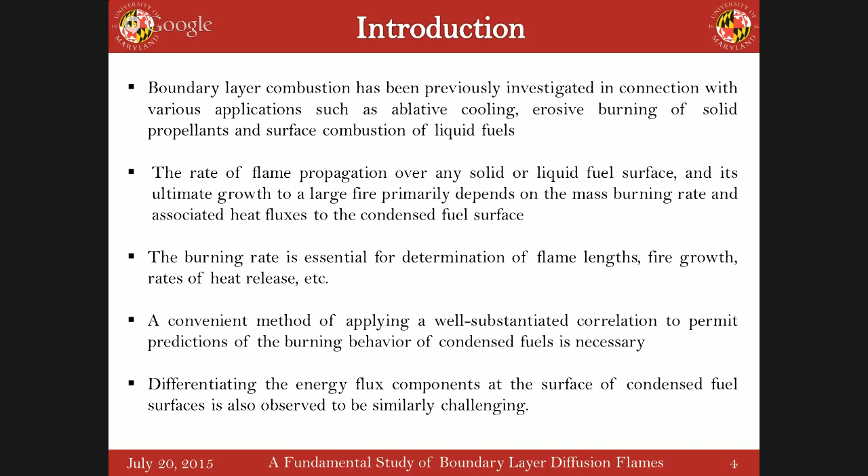So the method we propose here essentially has its basis in the Chilton-Colburn extension to the Reynolds analogy, which essentially relates the heat, momentum, and mass transfer in a boundary layer over a solid or liquid fuel surface. Equation 1 represents that, which essentially relates the heat, mass, and momentum transfer.

Tau S represents the shear stress at the fuel surface, h represents the heat transfer coefficient, M dot represents the mass burning rate per unit area, Nu is the kinematic viscosity, Cp is specific heat, alpha is thermal diffusivity, D is mass diffusivity, and ln(1+B), where B is the mass transfer number, the Spalding number. Now, the ln(1+B) expression comes from the stagnant film hypothesis.

Also, Emmons, in his classical work, when he solved the forced convection burning on a flat plate and gave a similarity solution for that, hypothesized that the shear stress at the surface of a combusting fuel must be proportional to the local mass burning rate. And he came up with this expression, which relates the local mass burning rates with the shear stress at the condensed fuel surface.

So essentially, if you can measure the velocity gradient at the surface of any condensed fuel surface which is burning, you can do the calculation for the local mass burning rate. It's a very neat expression, very simple, though oversimplified. The proportionality constant here depends upon the mass transfer number B.

Also, in a boundary layer, the heat transfer coefficient for the boundary layer diffusion flames can be approximated by equation number 3, where H is related in terms of the non-dimensional temperature gradients at the surface. Now, T star is basically a non-dimensional temperature.

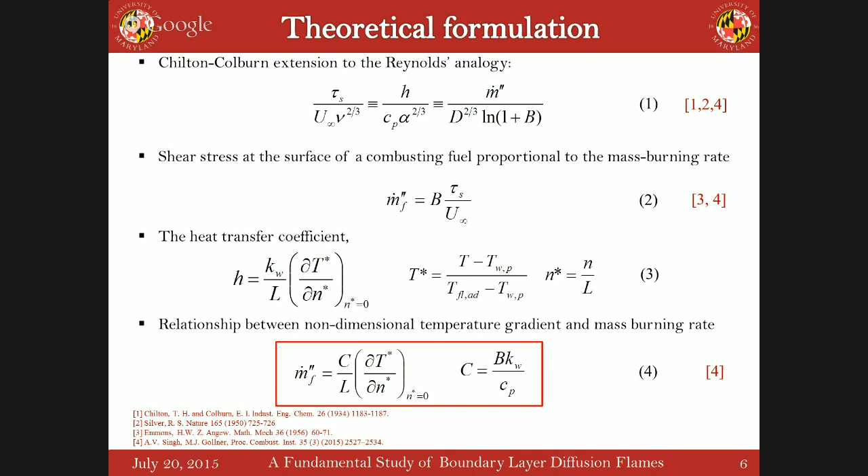So we started with the laminar flames. After formulating this expression, we started looking in the literature for researchers who have reported the temperature profiles as well as mass burning rates in their papers. We could only find 2 papers.

Boundary layer diffusion flames have been studied since the 1950s, 65 years in the past. Only 2 papers in which we found the total temperature profiles along the condensed fuel surface as well as the data of the mass burning rate.

So what we did was take the papers, extract the experimental data, and calculate the local temperature gradients from the temperature profiles. We used our correlation and found that the mass burning rate we predicted actually comes out very close to what they reported. The error was less than 10%.

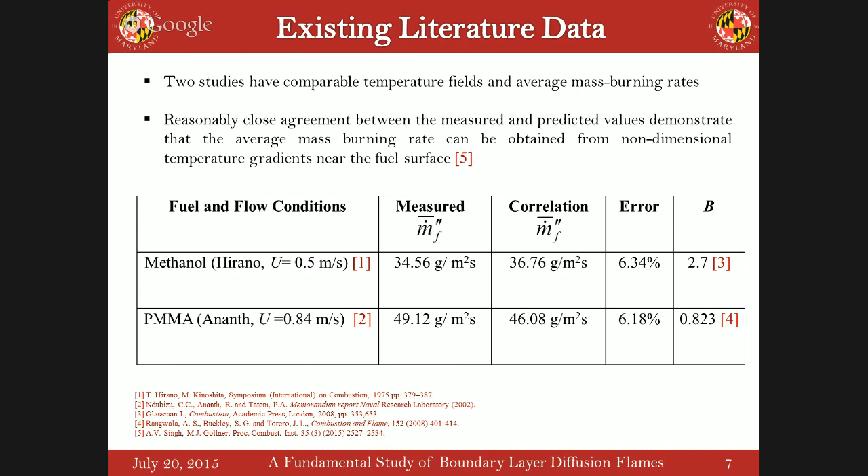We got excited, so we started to do some numerical simulations in ANSYS Fluent, because I'm good at ANSYS Fluent. We set up numerical models in order to study the forced convection boundary diffusion flames as well as the free convection boundary diffusion flames.

So all the computational domain and the boundary conditions used in the model for the steady burning of the methanol and ethanol pool - we used 2 different types of fuels, methanol and ethanol, in order to see whether there are effects of different fuels or not. And we started with the numerical solution, studying all the boundary conditions.

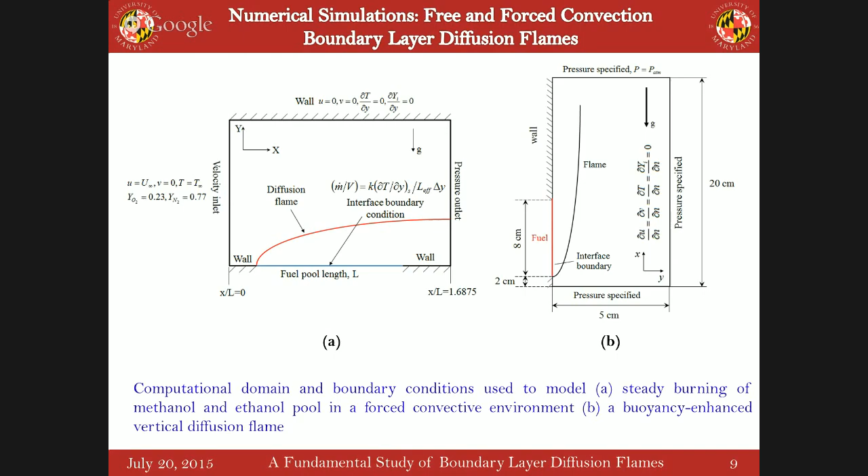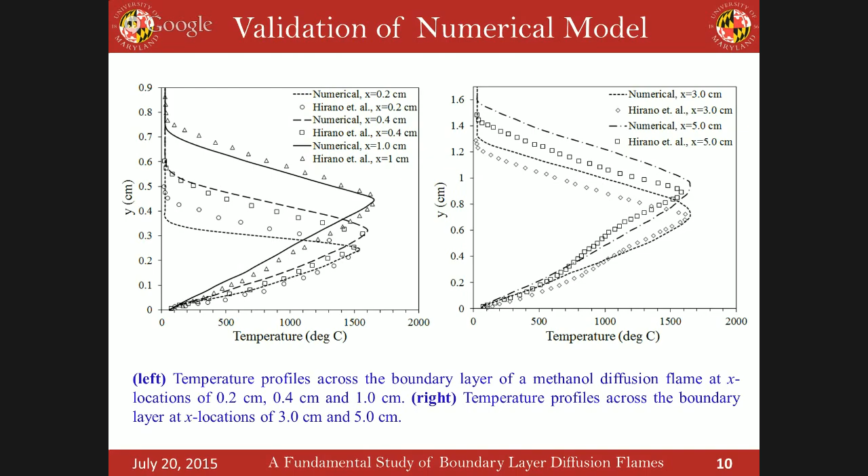We validated our numerical models with Hirano's experimental data, and we found that our numerical model predicts the flame standoff distances as well as the peak temperatures quite accurately. So after validating the numerical model, we went on calculating the average mass burning rates in such flames.

In the forced convection flames, this is the data for the methanol forced convection diffusion flame stabilized at different free stream velocities - these are the average mass burning rate profiles. We compared it with the experimental data from Hirano et al., and they come out very close. What we found was that the average mass burning rate was found to increase monotonically with the free stream velocity, and that is normal, everybody knows that.

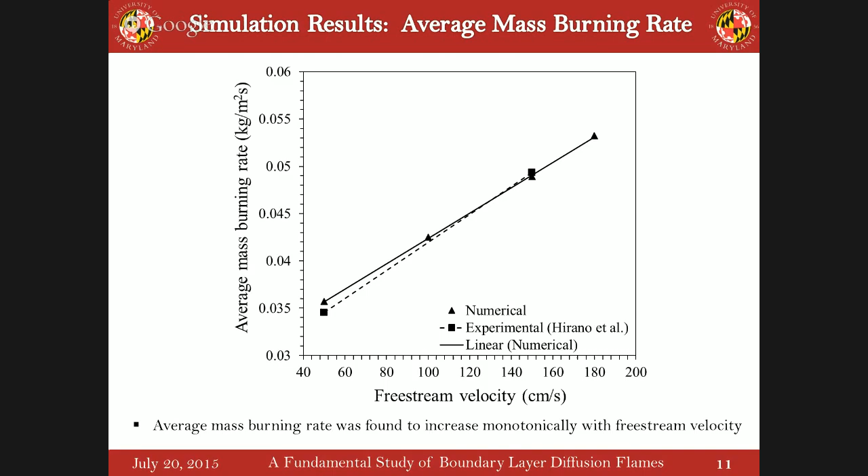We started doing that numerical simulation. So these are flames stabilized in methanol and ethanol at lower velocities of U infinity equal to 0.5 meter per second, and these are flames stabilized at a higher free stream velocity of 1.8 meter per second. What we see is that for the lower free stream velocities, buoyancy plays a lot of role - you actually get a second anchoring point, and that is due to the buoyancy.

Basically what it does is entrain the air from the domain exit, introducing a recirculating pattern, and that's why at low free stream velocities you get a second anchoring point - because the inertia forces are not sufficient to overcome the buoyant forces. At higher flow velocities, you don't see the second anchoring point because the inertia forces totally dominate the buoyant forces, and this is how it looks like.

So the temperature profiles from the condensed fuel surface rise from the boiling point of the liquid or solid fuels up to a maximum flame temperature, and then they decrease into the ambient atmosphere to the ambient temperature.

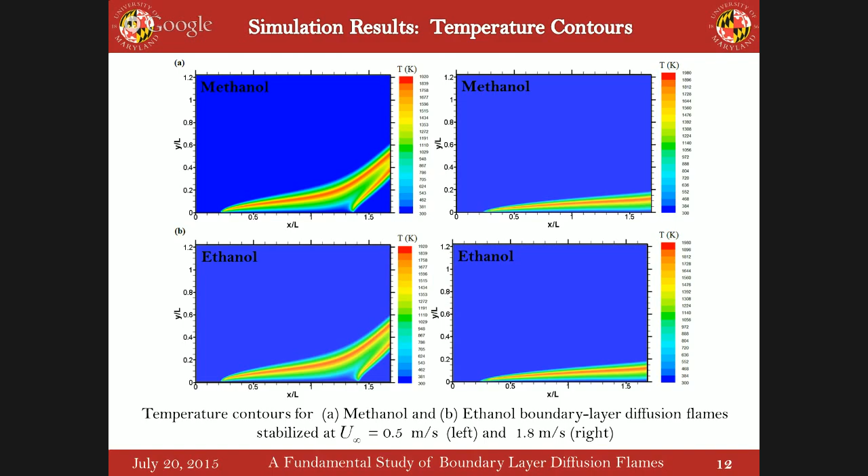So why am I saying that? Because velocity gradients are essentially the shear stress, and temperature gradients are essentially heat transfer. So all these things are intrinsically coupled. Heat, mass, as well as momentum are all intrinsically coupled with these boundary layer diffusion flames.

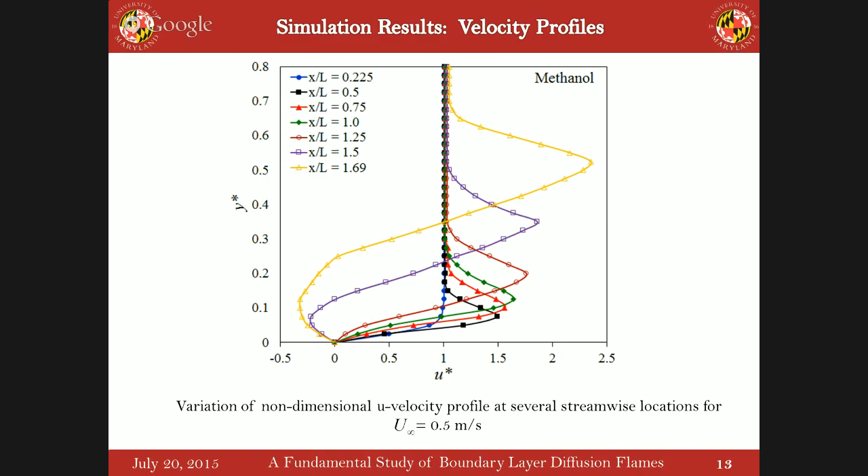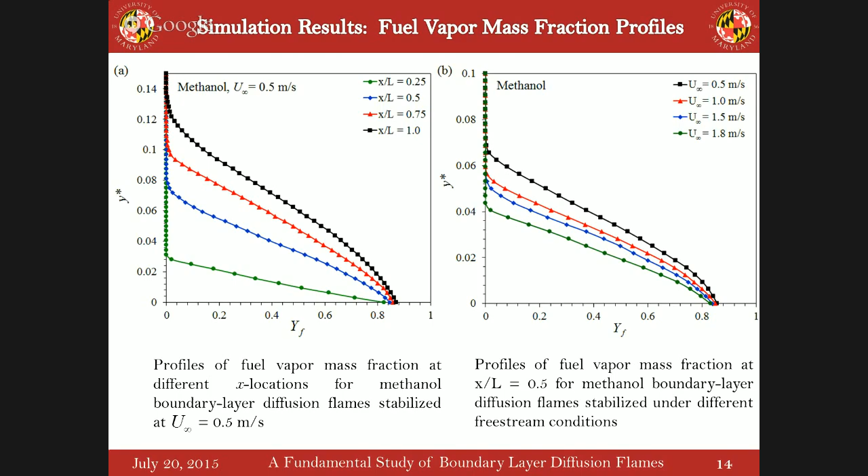So these are the free convection flames, which we did the simulations for. This is the methanol diffusion flame at a particular time of 0.75 seconds. What we clearly see here is that if you look at the velocity profiles, there is actually a velocity overshoot. The velocity increases near the flame zone and then decreases back.

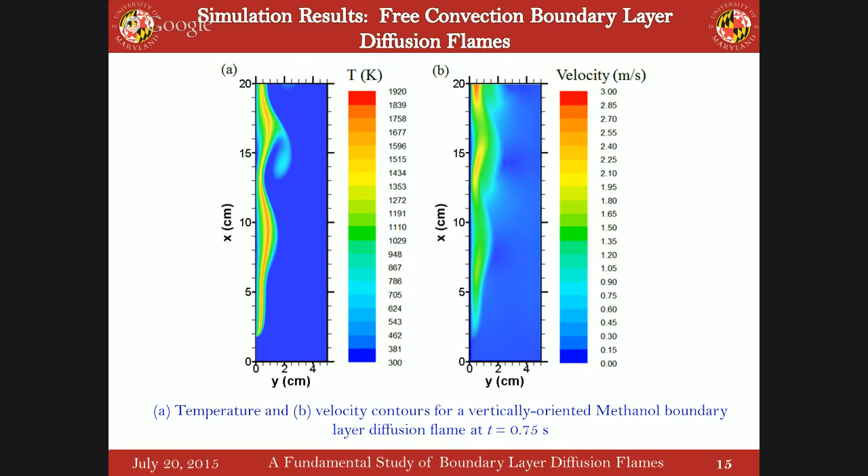Can I ask? Sure, Jim, go ahead. I wondered how you chose your properties. Okay, yes. So a lot of work, a lot of iterations, a lot of experiments, a lot of redoing of experiments, to ensure that we calculate these properties at specific temperatures, which we are going to tell you.

We evaluated the K at the wall. You're going to tell us. Yes, I'm going to tell us. So we actually optimized this thing so that it should work for every fuel. We optimized it, so this was a lot of work. It looks very simple, but it's one year of work.

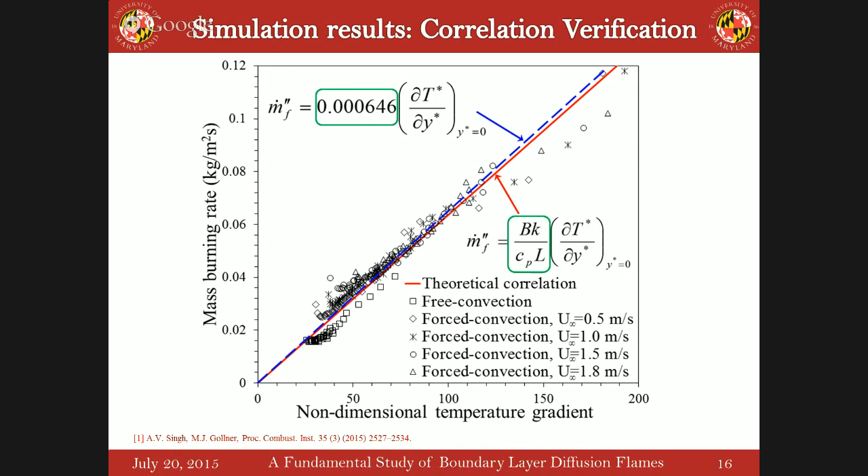So we'll move on to the experimental results, coming to the free convection boundary layer diffusion flames. We started building up a setup for the free convection boundary layer diffusion flames.

So what we do is take up a Velmex 2-axis traverse mechanism, mount a thermocouple, and basically do the grid scanning of the temperature profiles. We measure the temperature profiles in such free convection boundary layer diffusion flames.

So the condensed fuel wick is basically an insulation board, which is 8 by 8 centimeter. We bake that wick for around half an hour, and then we saturate it with around 90 ml of fuel for the free convection flames, and then we burn it.

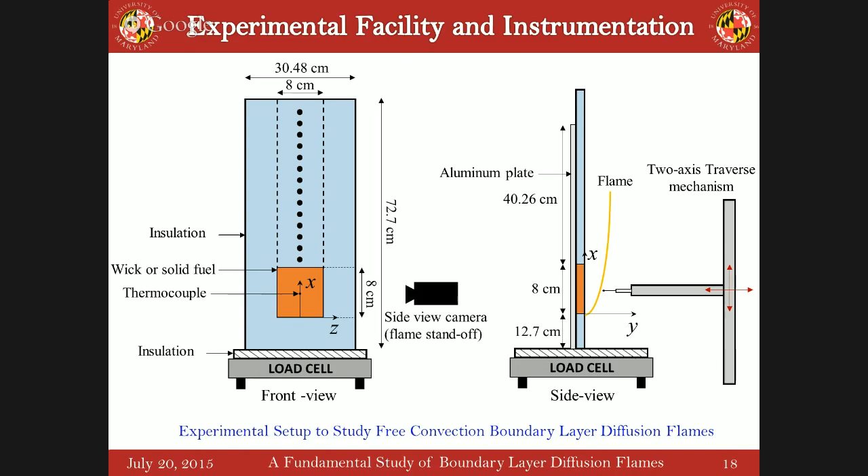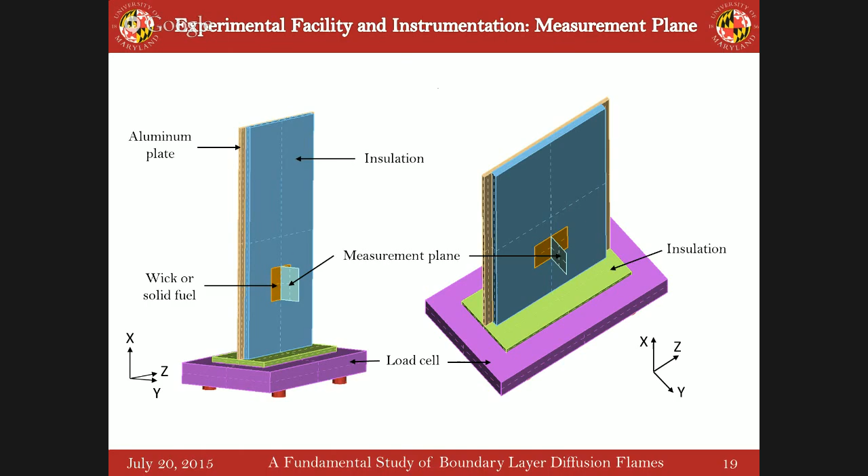So this is how the setup looks like. Basically, we have a condensed fuel wick that is burning, and we have a thermocouple on Velmex XY slides. The Velmex XY slides were controlled by stepper motors, which is basically integrated. The stepper motor controller was then integrated with LabVIEW, so we automated the whole process in order to do the grid scanning of the temperature profiles.

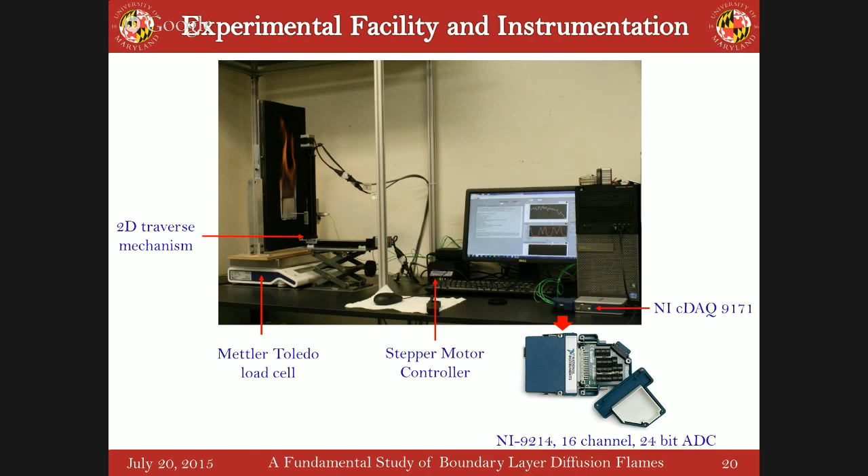Now let me talk about the challenges here. When we started using the condensed fuel wick, the problem is that it only burns steadily for around 450 seconds. It doesn't burn steadily more than that because it starts to dry up, and then the mass loss rate tries to reach a plateau and then will start decreasing.

So basically, we only wanted to measure during the steady burning regime, that means where the mass loss rate was actually constant, that slope was constant. So we have to map the whole temperature profiles for boundary layer diffusion flames within 450 seconds. That's why we automated the whole process, so that we can map the whole temperature profile of a particular boundary layer diffusion flame within that time period of steady burning.

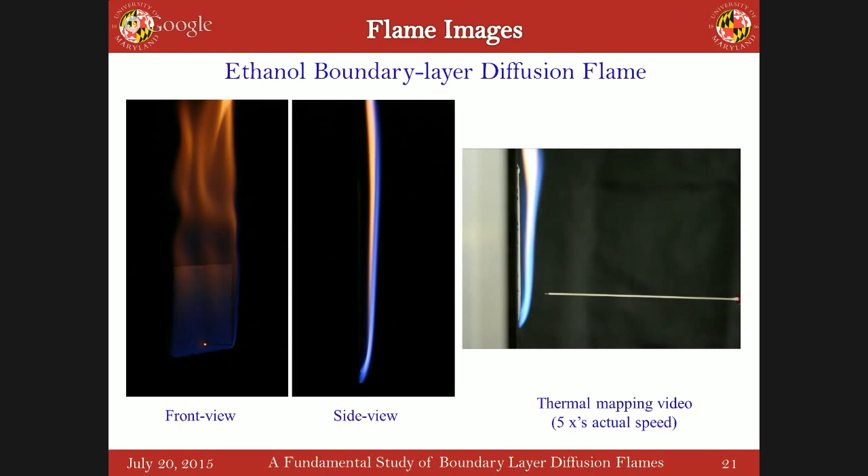So what we see over here is the front and side view for an ethanol boundary layer diffusion flame. And this is the thermal mapping video we use with the Velmex traverse mechanism.

So all the temperature profiles, basically the thermocouple measurements that we have done, have been compensated for the radiation corrections. We incorporated the radiation corrections in the raw temperature profiles. We use a classical expression from Collis and Williams with the Nusselt number correlation in order to account for the radiation corrections within such flames.

And we found two equations, two unknowns, and you can solve those equations and basically account for the radiation correction in such flames. So these are basically the radiation corrected as well as the raw temperature data profiles at the leading edge as well as the trailing edge.

Ajay, what did you choose for the second unknown? Which unknown? You said two unknowns. One unknown is basically the gas temperature Tg, and one unknown is U, capital, the velocity. So basically, you get the velocity as well. Good.

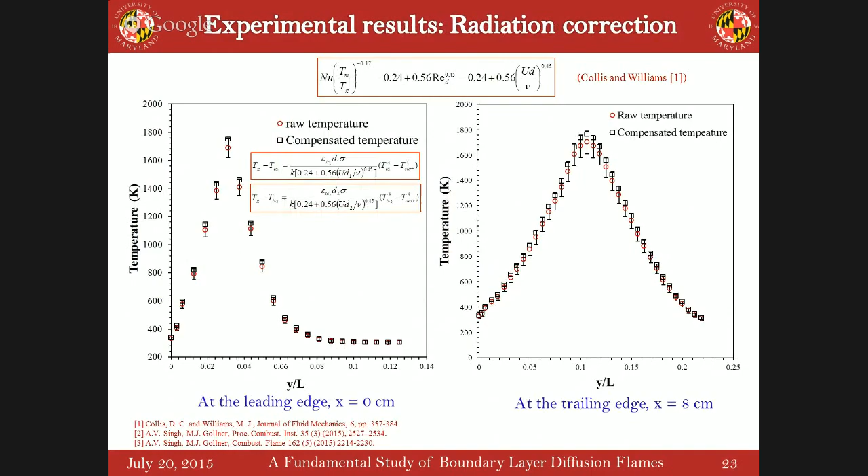So these are the temperature profiles in the free convection diffusion flames for methanol, ethanol, as well as PMMA. In the PMMA case, we didn't do the temperature profiles near the leading edge because it was very intensely bubbling there, so we started from x equal to 1 centimeter and made the complete temperature profile.

What you see here is that the temperature increases from the condensed fuel surface, which is at the vaporization temperature of the fuel, to some maximum flame temperature, then decreases somewhere downstream towards the free stream. When we measure the condensed fuel surfaces, the temperature remains approximately at the boiling point of the liquid fuels. However, in the case of the PMMA molten surface layer, temperature actually varied.

We did some measurements of the surface temperatures of the PMMA, and we found that the PMMA molten layer temperature decreases rapidly as we move from the leading edge towards the trailing edge. The temperature decreases from around 708 Kelvin to somewhere around 650 Kelvin. So this is how the molten layer temperature of the PMMA surface decreases.

So Ajay, the leftmost figure? Yes, the leftmost figure, and then the figure to the right. So are these which temperatures? No, the leftmost figure here, all the way to the end. Right, so you've got a nice profile in Y. And then what about the profile right next to it? This is for ethanol.

I get that, but you have gas temperatures, and you have a Y here. But what is this profile you're showing? For this profile, this is the leading edge of the fuel surface, and that is the trailing edge of the fuel surface. I got that. And then what about right next to it?

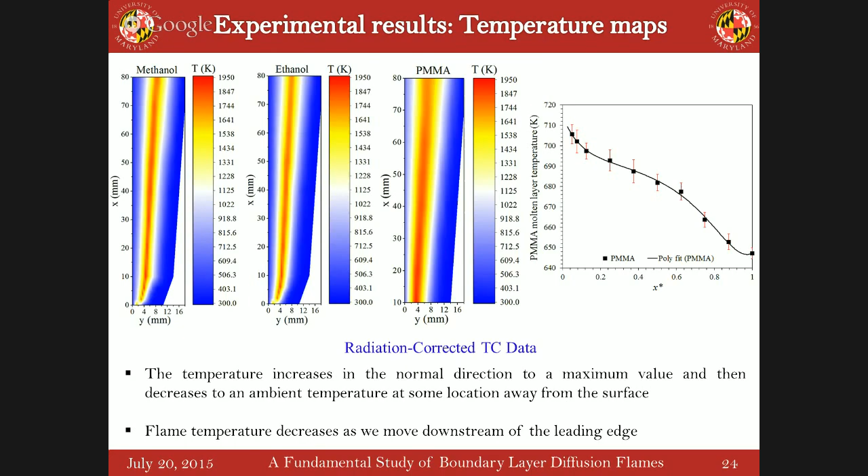So this is basically the PMMA molten layer temperature. The liquid fuel surface temperature we have also plotted, so the graph is there in the thesis, but I don't think we have it in the slides here. We have plotted that, so we have measured both: at the condensed fuel surface as well as the temperature of the flame.

Now coming to the experimental results for the flame stand-off distances, we also measured those by two methods. One was visual, using a side-view DSLR camera photograph to measure the flame stand-off distance, and the other was by noting where the peak temperature is located along the y direction. So we did it by both methods: one visual, from the side-view photographs which we process, and the experimental data from the probe measurements.

What is important here is that the non-dimensional flame stand-off distance, in both the methanol and ethanol cases, is almost proportional to x raised to the power 1/4, meaning it follows the boundary layer scaling rule. However, in the case of the PMMA, it doesn't follow the boundary layer scaling rule; it's basically x raised to the power 1/3. Why it doesn't follow the boundary layer scaling rule, I'll talk about later when presenting the other results.

So coming to the temperature, yes. So you have this x to the 1/4 power, and you say it follows the boundary layer scaling rule? Similarity. Okay, so I'm just wondering why the standoff distance would follow a boundary layer scaling rule. It is going to follow. But why? It's not the boundary layer, right? It's a flame standoff. Yeah, so it's like a flame standoff, it's going to be like the thermal boundary layer thickness divided by 2, right? If you do that, possibly, yes, it depends upon what it would be.

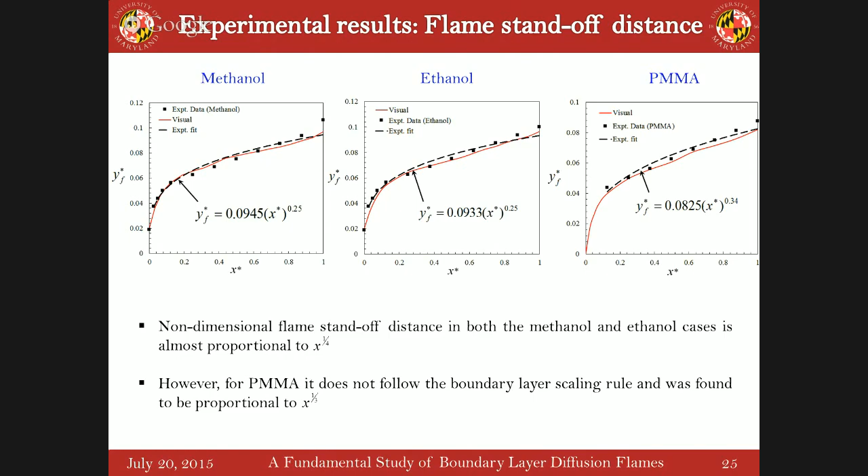So these are the normal non-dimensional temperature gradients that we extracted from our thermal profile data, for methanol as well as ethanol. And in the figures to your right, these represent the non-dimensional temperature gradients for the PMMA surface.

What we found is that the temperature gradients actually decrease from the leading edge of the fuel surface towards the trailing edge, in both cases. This should happen because the flame standoff distances actually increase from the leading edge towards the trailing edge, so the temperature gradient has to decrease from the leading edge towards the trailing edge.

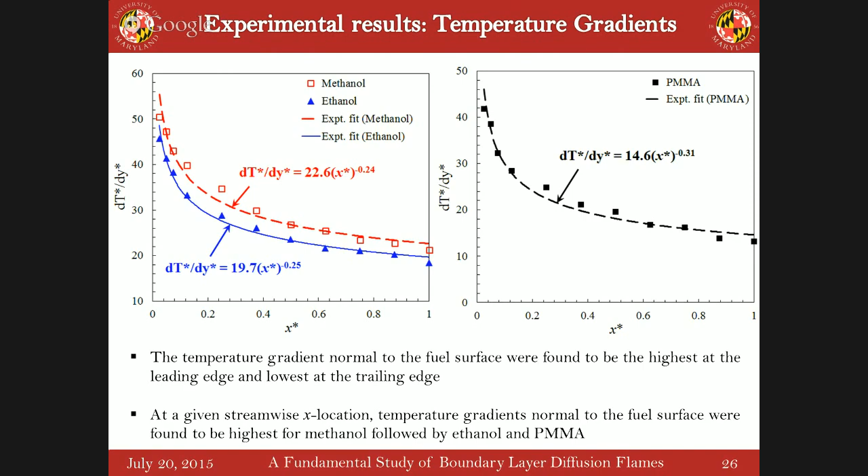Also at a given streamwise X location, we used our correlation to calculate the average mass burning rate with the help of the average temperature gradients that we extracted from our data.

And we were measuring the average mass burning rate through the load cell, which is basically the measured one, representing the average mass burning rate, because we were using the load cell to measure the average mass burning rates.

And this is the average mass burning rate that we got from using the correlation. So after extracting the average temperature gradients from the fuel surface and using the correlation, we found that the mass burning rates by both methods come out to be real close. The error was less than 15% in all three cases.

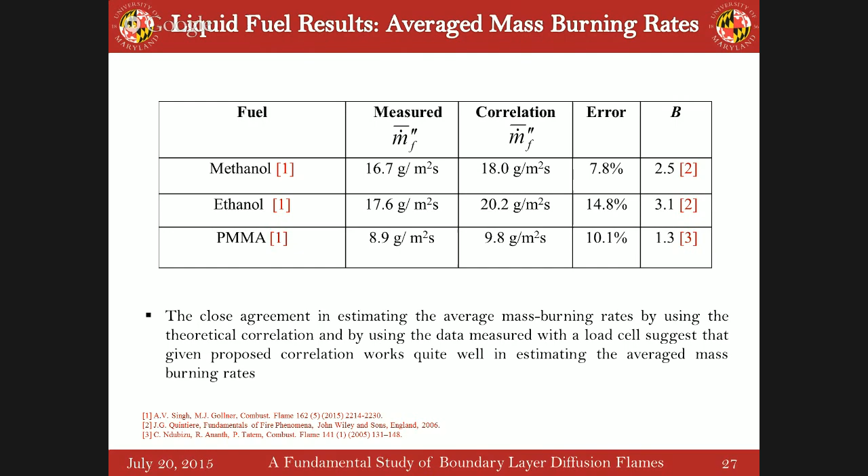And these are the B numbers that we used for that. So the close agreement in estimating the average mass burning rate using the theoretical correlation and the data measured with the load cell suggests that the given correlation works quite well in estimating the average mass burning rates.

Now, after estimating the average mass burning rates, we also wanted to know how well it correlates with the local mass burning rates. So we used the theoretical results of Kim et al., and we plotted that for the methanol 8 by 8 centimeter burning surface.

And this is our methanol experimental data that comes out to be very close. Initially, when we had not optimized the transport properties and at what temperature we should calculate them, it was a little bit off, but then we optimized it, and it came out to be very close.

And you're getting the local mass burning rate experimentally? Yes. How do you do that? By the local temperature gradients.

Just a clarification: the B number you're using is the purely convective B number? Yeah, we use the purely convective adiabatic B number. So everything's just from fundamental properties, there's no tweaks, because otherwise you could just tweak it.

So this is the methanol numerical data that we got, that we are getting, and it also comes out to be very close.

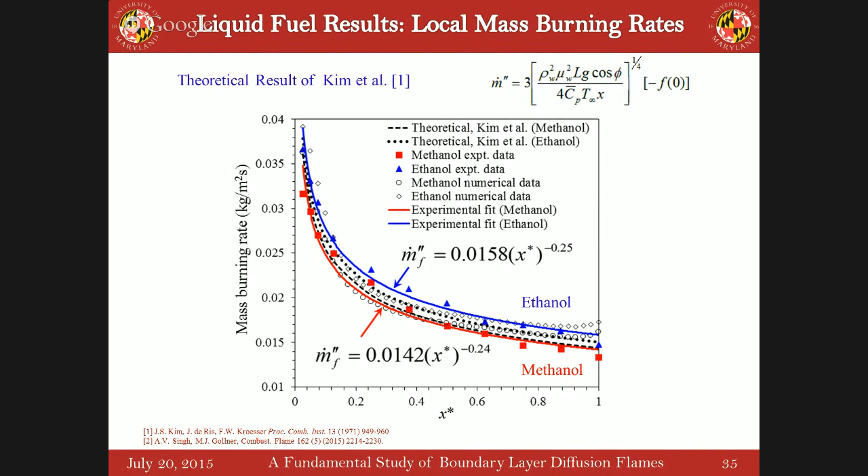Also, we burn solid fuel PMMA in order to challenge us further. We started burning the solid fuels and used PMMA because PMMA burns clean, it does not form char.

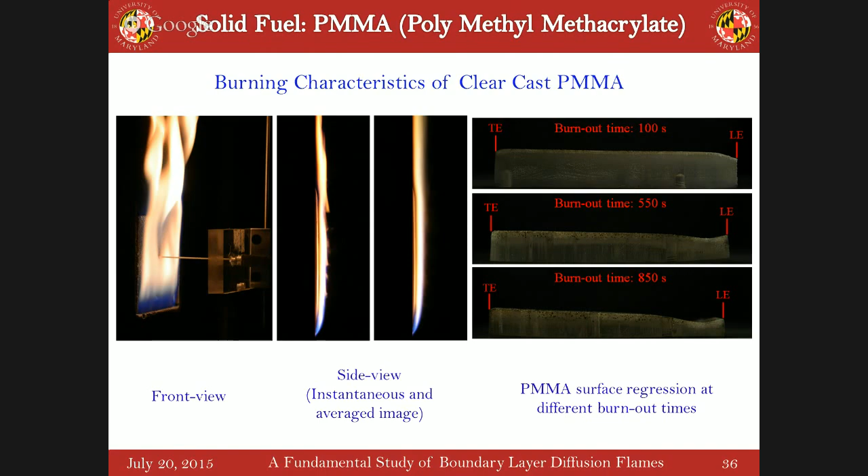So we started using PMMA measurements, and if you look at the surface of the PMMA after burnout at different times, you will see that it has regressed before the origin. You will see a valley forming before that, after a long period of burning. These are the regression profiles for the PMMA surface, as well as the time average regression rate. We burned the PMMA for fixed intervals of time, let the sample cool, cut it down from the middle, and measured how much the surface had regressed. We then calculated the time average regression rate based on the regression divided by the total time of burning, giving us the regression rate.

What we see is that significant regression was observed in the leading section compared with regression locations downstream. Regression rate increases with time in the trailing section due to increased heat feedback with time and slow in-depth heat conduction in this section. Essentially, these are due to edge effects. If you look at the trailing edge, you find that for increased burning times, the regression rate actually increases.

So Ajay, in doing this calculation, do I understand correctly that you assume I take a piece of PMMA, heat it up to 700 Kelvin, and then cool it down? The density of the resulting piece will not change - is that the assumption incorporated in this calculation? Let me come back again: I take a piece of PMMA, put it in the furnace, and uniformly heat it to 680 degrees, close to decomposition but not quite. Then I take it out, cool it down, and measure its density again. Will it change according to this?

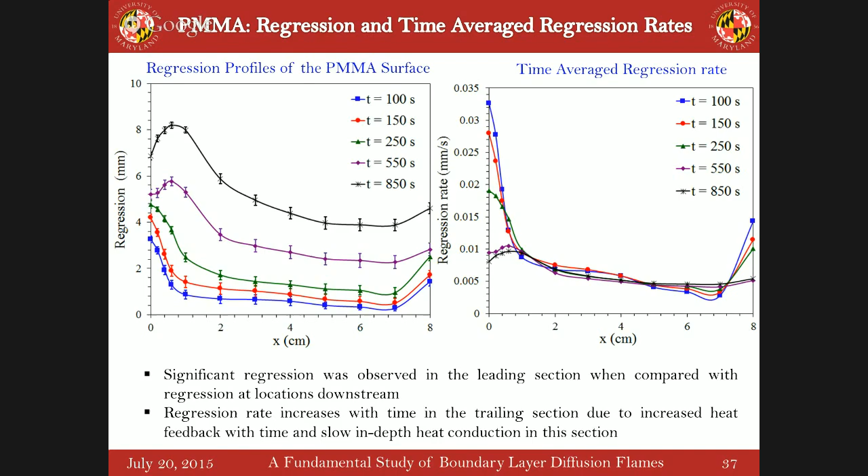So then we measure the mass burning rate at the PMMA surface, approximated by a posteriori approach, which was given by Pizzo. Basically using the density as well as the regression rate profiles at two different times divided by the total time, we can get the local mass burning rate.

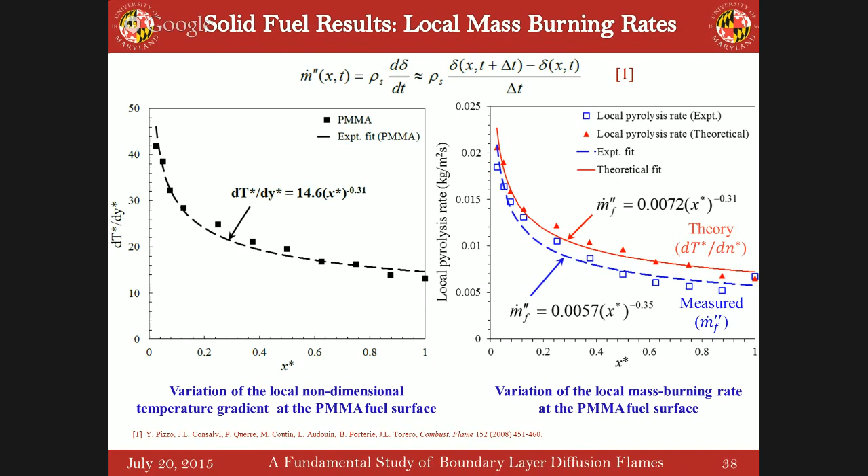And then these are the results. So these are the measured values, based on the regression rate profiles, and these are based on the temperature gradient profiles. They don't match very well, but they are pretty close. And of course, this is the regression rate profiles - there might be changes due to density or some other reasons. So this is how it looks like.

So I would like to skip this slide because this is already in the videos. So, heat fluxes in the pyrolysis zone. So then we started measuring the heat fluxes. What we did is, since we have measured the local mass burning rates at each location of the condensed fuel surface...

We can basically extract the net heat flux out of that by just multiplying it with the effective heat of gasification. Since we are measuring the temperature gradients at the condensed fuel surfaces, we can extract the convective heat flux out of that. And we are measuring the temperatures at the surface, so we can basically extract the radiation heat flux from that, and we can easily calculate the radiative heat flux by just doing this simple energy balance.

So this is how the convective heat flux would look like, and this is basically by using the crude approximation, because this crude approximation is being used by researchers - they have approximated the convective heat flux by K delta T by YF, where YF is basically the flame standoff distance. So how the crude approximation relates: it gives pretty good results here, but it just doesn't do that well over here.

So how do you get the flame radiation? Since we are measuring the local mass burning rate m dot, we are getting the net heat. Everything else we know because we are measuring that, so we can just do the calculation. So this is the surface radiation from the surface - basically for the liquid fuels, the radiation from the surface is very small, however for the PMMA, it's quite a lot.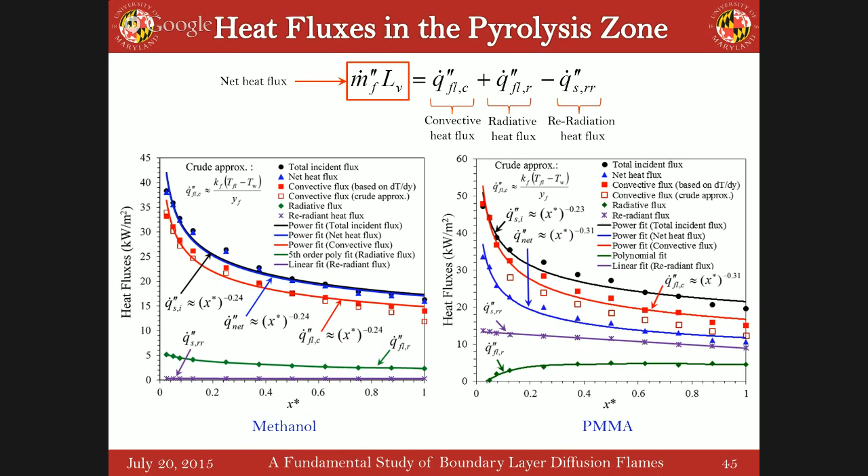So the idea is that we can actually do the calculations for all the components of the flame heat flux using this methodology. These are the average heat flux values. So for methanol, ethanol, and PMMA, in all cases you will see that the convective heat flux is around 85% of the total incident heat flux. These are laminar, steady, small flames, where convective is the dominant mode of heat transfer to the condensed fuel surface, and basically pyrolyzes the fuel.

How large are your plates? Just to remind us, how large are your plates? How large are you burning? How tall is your boundary—what's L? 8 centimeters. 8 centimeters, 8 by 8 centimeters.

I have to ask that question—but I'm wondering, have you thought about what happens to all your scaling laws as L changes? In other words, let's say you did 100 centimeters—how is it going to change? So I will come back to that. Everything will be answered at the end, in the conclusion section.

That's fine. Why do you use the temperature data to get the mass flux in that equation? Why wouldn't you use the regression data since it's independent? So regression data can be used for the PMMA—why can't you use it for this case? So we can, but I used the temperature gradients because when we compared the data with the load cell, we were also measuring the mass loss rate with the load cell.

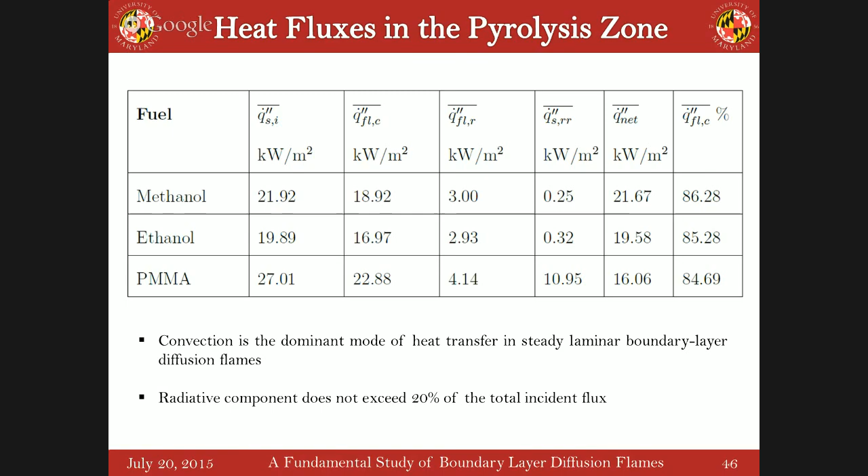So we also measured the convective heat transfer coefficients. Convective heat transfer coefficients can be represented in terms of the non-dimensional temperature gradient—if you measure the non-dimensional temperature gradients, you can measure the convective heat transfer coefficients. These are the measured convective heat transfer coefficients for both methanol and ethanol PMMA.

This is from theory, basically for a vertical flat plate heating in a free convective environment. You can approximate using the flame temperature, and then measure the transport properties. Theory doesn't predict very well for the case of PMMA, but it comes out to be very close for the methanol and ethanol data.

This is H measured by the crude approximation. The crude approximation relates H in terms of Kf by Yf, where Kf is the mean film thermal conductivity and Yf is the flame standoff distance. The crude approximation actually over-predicts the convective heat transfer coefficients.

But it depends what you pick for K. K is basically the mean film temperature, the average of the flame and the wall temperature. So yeah, it will depend - I picked the mean film temperature, the average of the flame and wall temperatures. Now if somebody else picks K as something else, he will get something else.

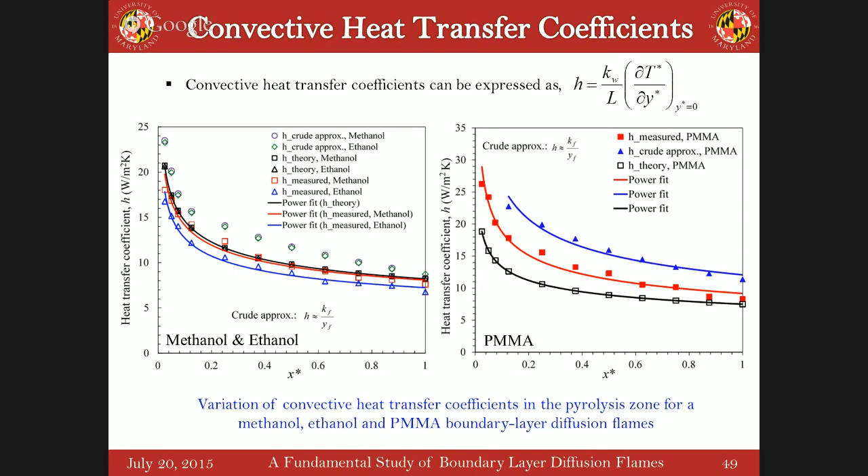So this is the local Nusselt number we got, this is actually HX by KW. So you got the Nusselt number from the methanol and ethanol data, then we compare it with the theory. For the ethanol experiment we come out very close, but for the PMMA it doesn't follow that much.

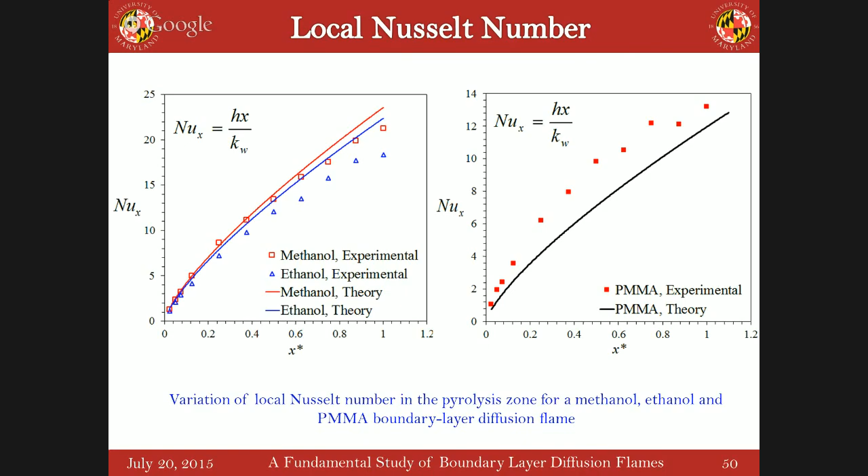We also did some plume thermal analysis, measuring temperature profiles in the plume. Why did we do this? Because it wasn't part of our original study - we were trying to make a wind tunnel for forced convection diffusion flames, and our blower was to be shipped from Germany, which took around 4 months. So we did the plume thermal analysis during those 4 months.

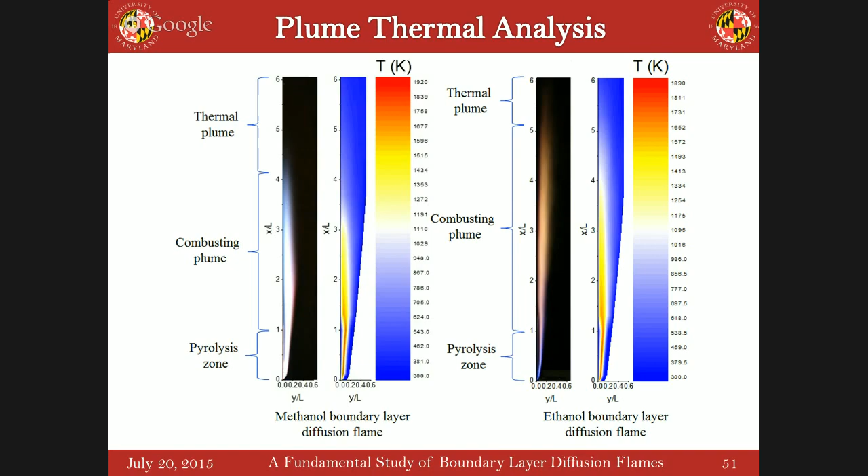So we did the plume thermal analysis. What we see is that as you go towards the plume, the flame starts coming back to the wall. The maximum temperature decreases monotonically with increasing height along the wall, and the position of the maximum temperature moves closer to the wall in terms of Y by X as X increases.

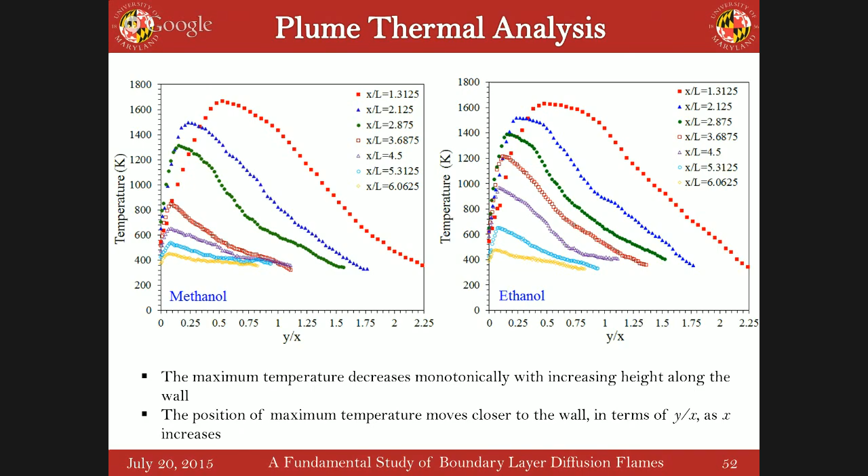After doing the free convection flames for the laminar free convection flames, we started doing forced convection flames. We tried to test this methodology in the forced convective environment as well, to see whether this methodology breaks down for different flow conditions or not.

So we started building up a setup. This is how the forced convective setup looks like. We have a wind channel in which an ebm-papst variable speed blower blows air. It pressurizes the plenum, then forces the air through a converging section through a set of honeycomb and turbulence reduction screens, giving a very uniform velocity profile at the outlet. We place our fuel sample right after the outlet of the wind channel, and we map the temperature profiles with help of thermocouples mounted on the Velmex UniSlides.

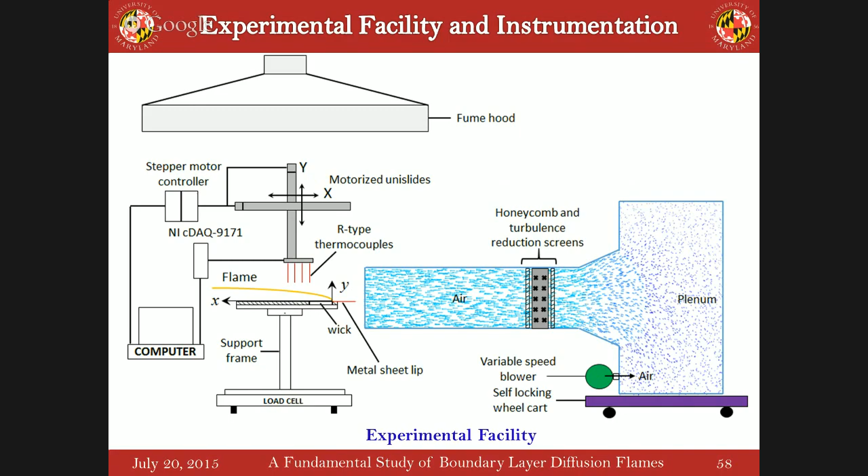So we made this amazing wind tunnel. I'm very proud of this. It does very, very good work. Why I say that, because at the region of interest where you place the fuel sample, the turbulence intensity is less than 1.5%. It gives very repeatable results.

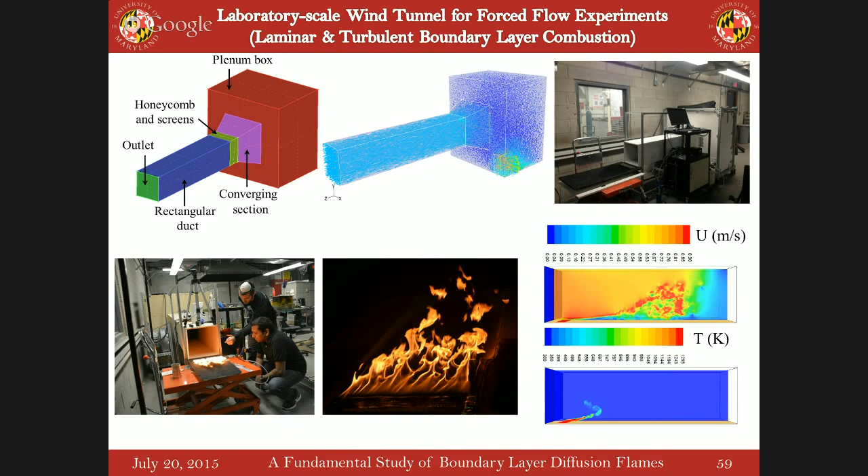We started doing some more experiments and studying the turbulent boundary diffusion flames as well for a while, both experimentally and otherwise. Mine is very much laminar regime, I'm not going into turbulence, I'm just measuring them. We totally characterized the wind tunnel outlet.

We characterized the velocity profiles at the wind tunnel outlet, as well as the turbulence intensity levels. We found that we get very uniform velocity profiles at different freestream velocities. As you increase the blower speed, you get very repeatable and very good uniform velocity profiles at different speeds.

We used a Dantec Dynamics hot-wire anemometer for doing that, and we characterized the whole outlet of the laboratory wind tunnel, so we exactly know what is coming out. The maximum velocity is 5 meters per second. It can go from 0.5 meters per second to 5 meters per second at increments of 0.1 meters per second. I think it can do more, but we tried to slow it down, we're purposely slowing it down.

These are the experimental results for the average mass burning rates that we measured through the load cell. As we can see, the average mass burning rate increases monotonically with the increase in the free stream velocity, and that is what is happening here. We got good data, these are the results for the average of 5 tests. The repeatability error for the methanol case, I think, is less than 2%.

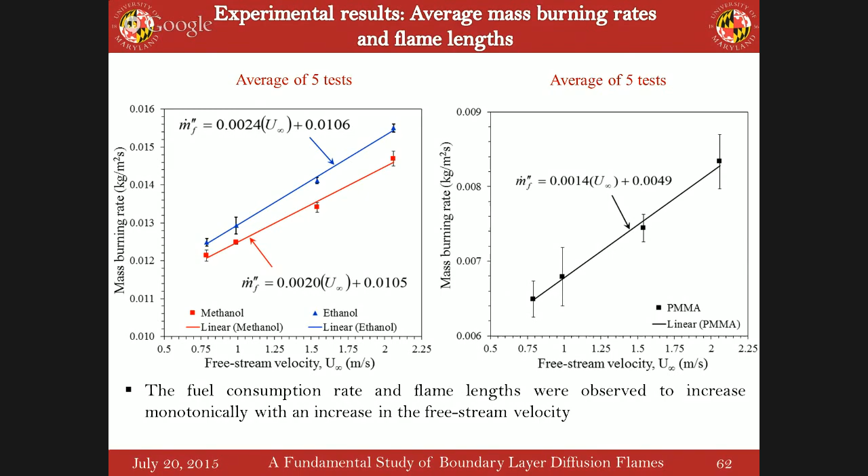And these are the flame stand-up results, these are the total flame lengths. The flame length also varies - as you start increasing the free stream velocity, the flame length of the fuel also increases monotonically with the increase in the free stream velocity. So this is the data for methanol, ethanol, and different fuels. We chose only 4 representative velocities: 0.8 meter per second, 1 meter per second, 1.5, and 2 meter per second.

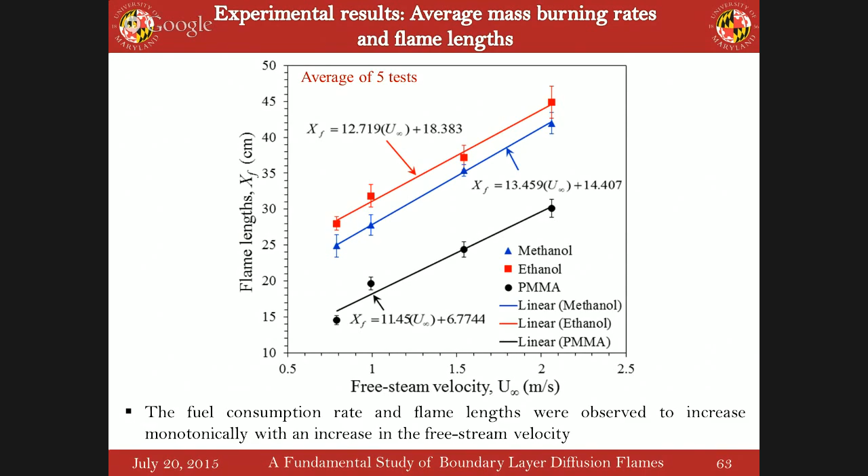So this is how the boundary layer diffusion flames under forced flow look like. The above data is basically for the methanol. At U equal to 0.79 meter per second and U equal to 2.06 meter per second, you again see a second anchoring point here for the methanol flame, as we have seen in the numerical simulation results as well. For ethanol, you don't see a second anchoring point here because it occurs much later, around 9 centimeters, so you don't see it here. And at high fluid velocity, you don't see a second anchoring point.

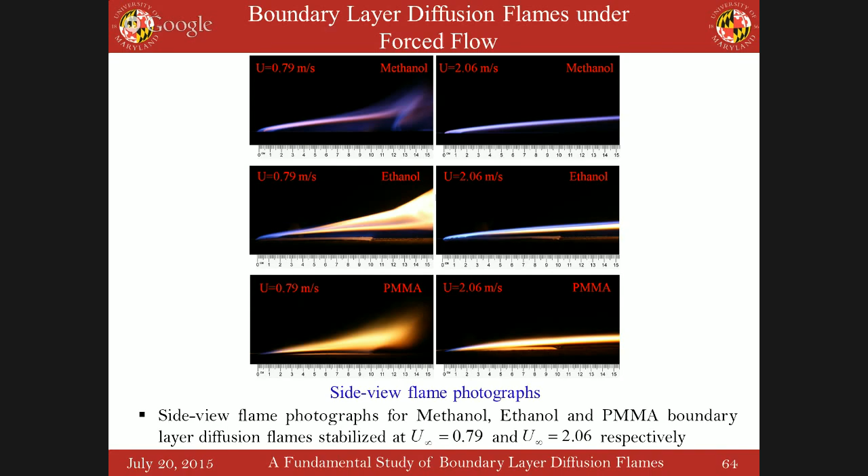And this is just a PMMA flame. For the PMMA flame, it was found that the second anchoring point used to occur only intermittently - it doesn't happen all the time.

In order to explain that, we basically did the Richardson number analysis. We calculated the Richardson number, which can be calculated by the formula given above. Delta T here is basically given by T flame minus T wall, and you can use this analysis.

What we found is that when the Richardson number was less than 1, for high free stream velocities, the inertia forces dominated the buoyant forces, and you don't see a recirculating pattern at the domain axis. That's why you get no second anchoring point. But when the Richardson number was greater than 1, the buoyant forces dominate, and because of buoyancy, it entrains some air from the outside and creates a recirculating pattern. That's why you get a second anchoring point.

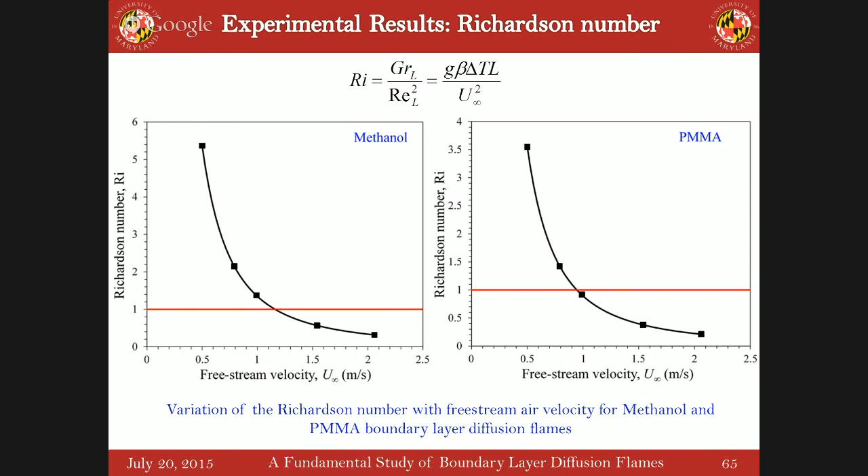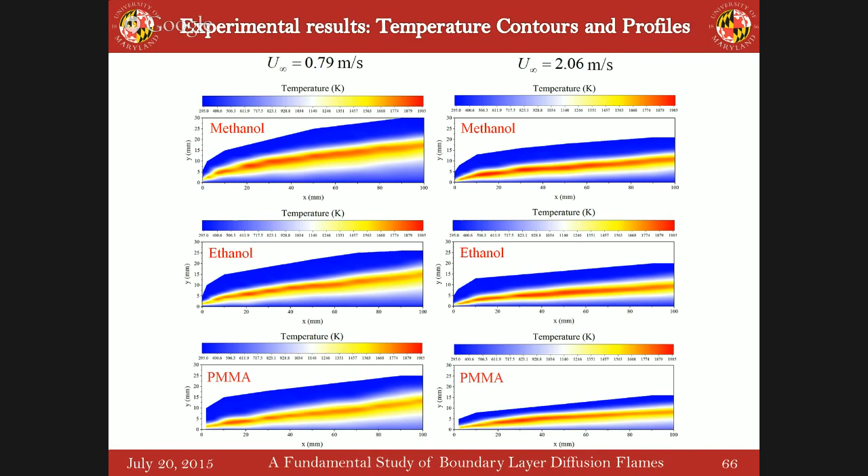So these are the temperature contours and profiles for the forced flow flame. We have methanol, ethanol, and PMMA, at different flow velocities. They look almost the same as a boundary diffusion flame would look like — the temperature increases in the normal direction to a certain flame temperature, then decreases somewhere away from the surface. These are the temperature contours and profiles we got for methanol, ethanol, and PMMA.

And again, we see what we see here. There's a lot of data, and if you start reading between the lines, there's a lot you can understand just by looking at the graphs qualitatively. The temperature gradients are very high near the leading edge and start decreasing. Also, the flame, which was very thin near the leading edge, starts increasing in thickness. That means as you go from the leading edge towards the trailing edge, the flame begins to thicken, and that's what you can see from the profile, just qualitatively.

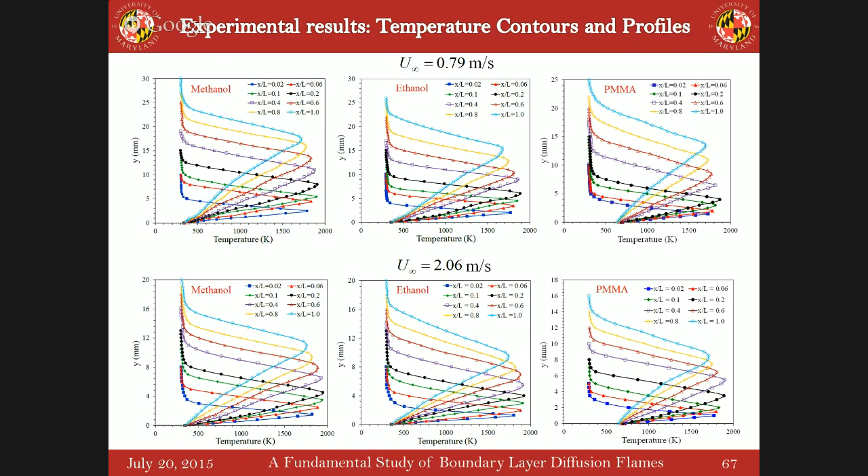The flame peak temperature actually increases monotonically with the incoming free stream velocity. So as the free stream velocity increases, your flame peak temperature goes on increasing. At a high flow velocity, your flame peak temperature will be the highest.

How does it compare with adiabatic flame temperatures, like at stoichiometry? For PMMA, the adiabatic flame temperature is around 2495 — a little less than that, around 2494 Kelvin if you do the calculation. So PMMA's adiabatic flame temperature is 2494 Kelvin, but if you measure it, it will only go up to 1950 Kelvin. For the methanol flames, the adiabatic flame temperature is 2150 Kelvin, and it will only go up to 1950 Kelvin maximum, after doing the calculations.

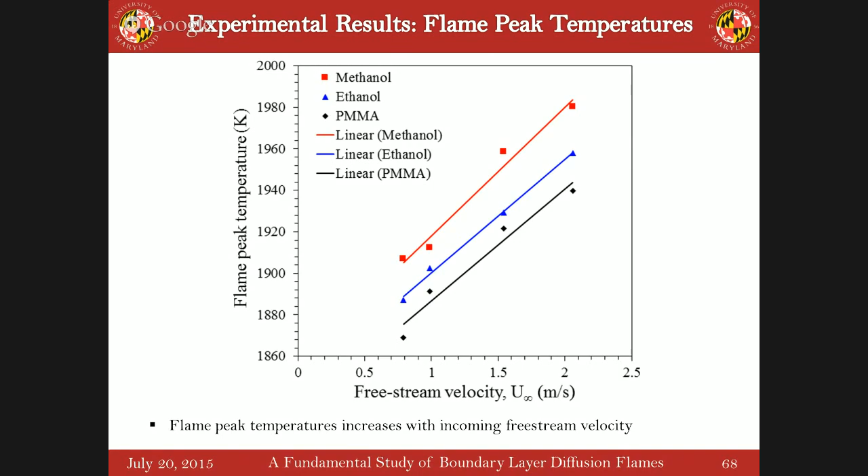If you do the calculations for the similarity solutions for the boundary layer, even for the reactive flow, you have to get that — there's no way you won't. But I'm still looking for the possibility where it doesn't follow the scaling associated with the conventional laminar boundary layer, because you have a complication, which is buoyancy. Could you imagine that complication impacting the scaling?

I forgot to mention we only tested from 0.8 meters per second to 2 meters per second. Within that range, it actually follows. If you go towards lower free stream velocity, the whole thing blows up — because as the number goes to 0, the boundary layer thickness becomes infinite. So that's another point I wanted to make.

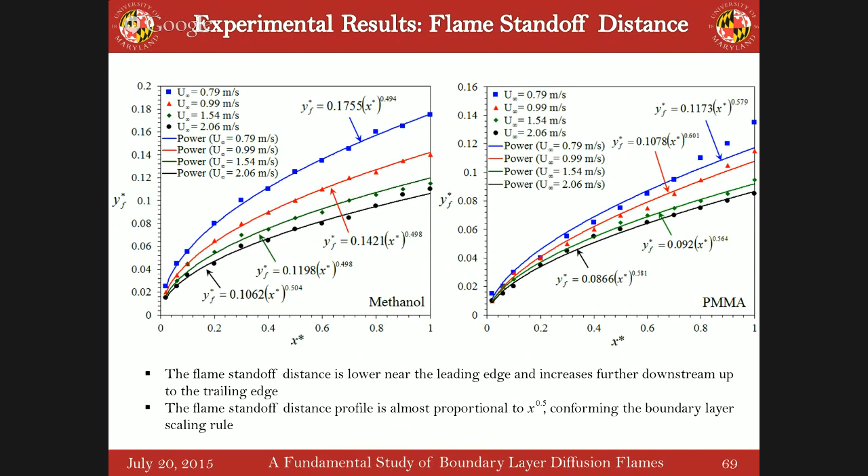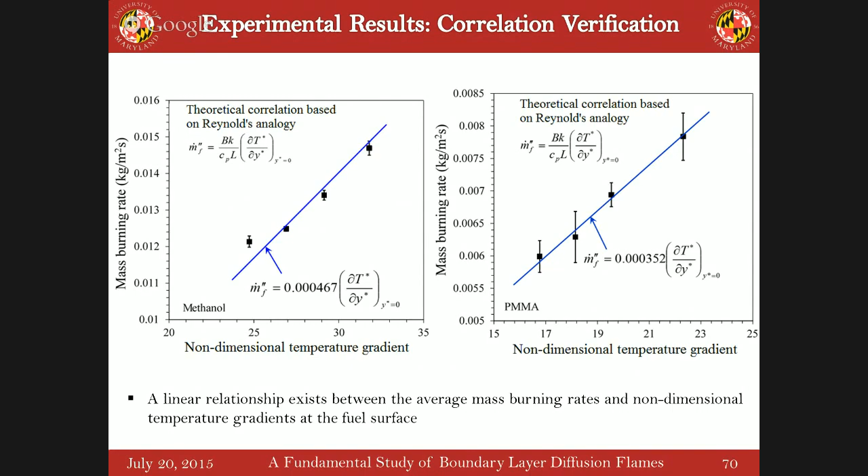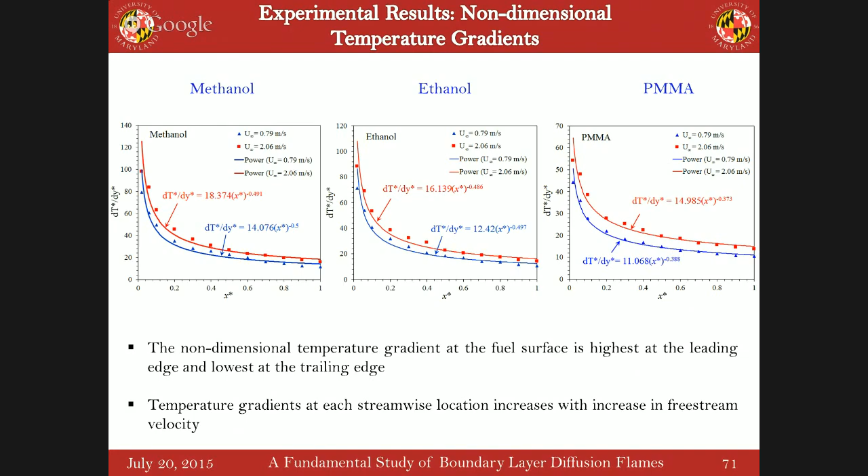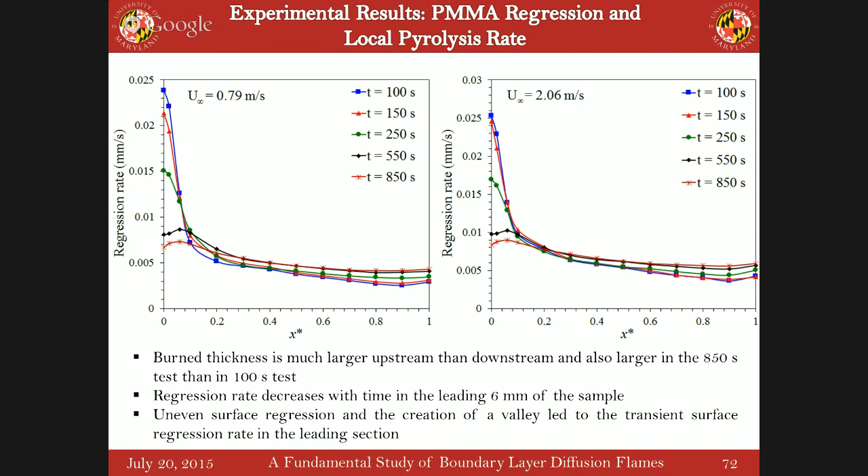So these are the PMMA regression and the local pyrolysis rate. It is the exact same analysis that we did for the free convection flames. We burned down the PMMA samples at definite intervals of time, allowed the samples to cool, and then measured the surface regression profiles. It almost exhibits qualitatively the same behavior as the free convection flames.

Now, the important thing I want to point out is that we also did some temperature measurements on the PMMA surface near the leading edge, at x equal to 6 mm from the leading edge. We found that if you make temperature measurements at different times, your temperature profiles actually change, because the PMMA surface regresses with time. Since the surface regresses with time, there's a moving boundary effect. Because of that, the flame temperature actually decreases as you increase the burnout time, and the flame standoff distance actually increases.

Similarly, for the trailing edge, at x equal to 80 mm, what we found is that for higher burnout times, the flame started moving with the surface. Now, one more thing I want to present: for higher burnout times at the leading edge, the flame standoff distance actually increases. One might expect that since the PMMA surface is regressing, the flame should move with the surface, so the flame standoff distance should decrease, right?

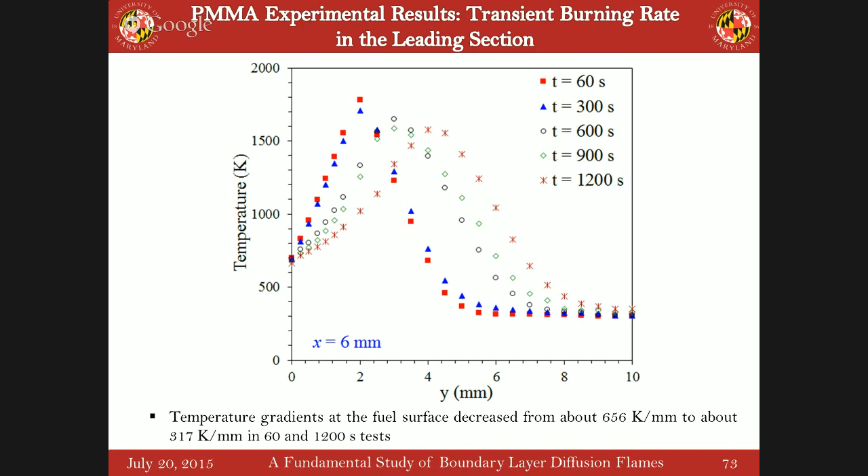But at the leading edge it doesn't happen, because you form a valley. As you start burning the PMMA, you form a valley, and the flame doesn't keep up with that valley formation. So after a long burnout time, the flame standoff distance increases. But in the trailing section, at long burnout times, the flame actually follows the surface and moves closer to it, following the regression of the surface, so the flame standoff distance decreases.

Though the temperature gradients do not change much here. But if the flame standoff distance is increasing and the temperature gradients are not changing, that means the convective heat flux is not changing. So what is increasing? I think the radiative heat flux is increasing here.

And that's why. What do you have upstream of the leading edge in your experiment? Nothing, or a plate? A plate. So there is an inert plate.

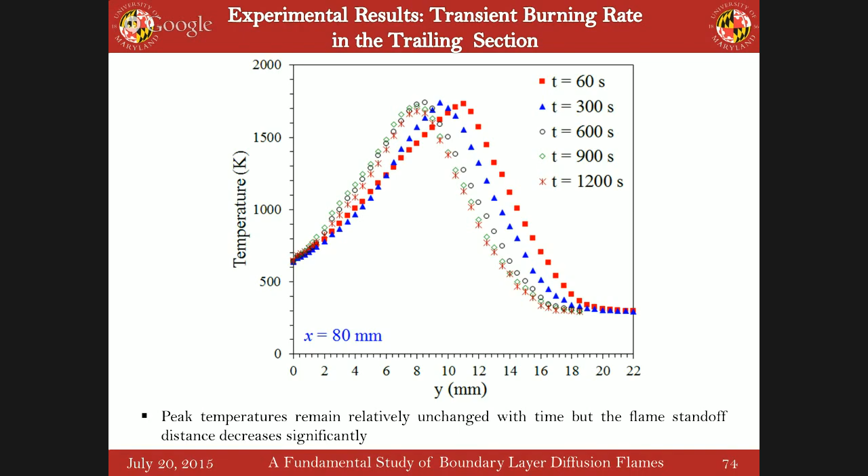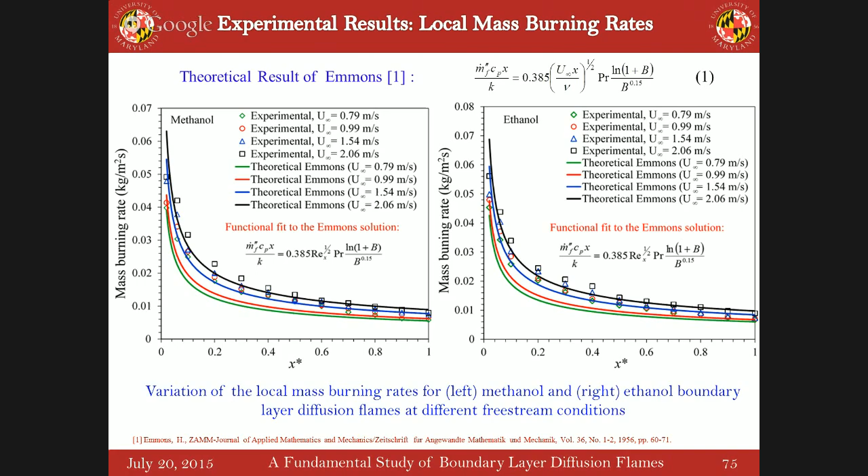Even for the ethanol case, it follows a pretty nice trend, and the errors happen to be small. So that means, if we start measuring the temperature gradients, it can give us a very good estimate of the local mass burning rates. It is an experimental value because we are measuring the temperature gradients, and it is dependent upon that, so we can extract that from there.

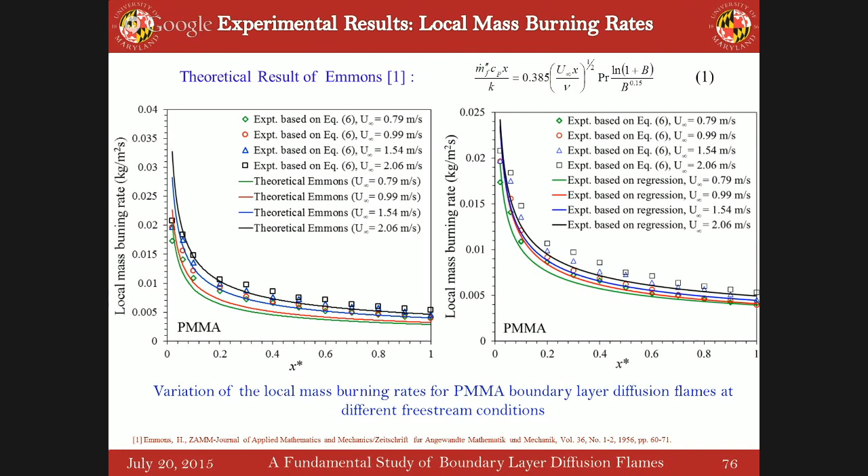Similarly, if we can measure the local mass burning rate, we can actually measure the shear stress, local wall shear stress of the surface as well, using the Emmons' hypothesis. That means by relating them with the B number and the U infinity, we can extract the shear stress of the surface. We extracted the local wall shear stress for all 4 flames, for methanol, PMMA, and ethanol, for the different velocities.

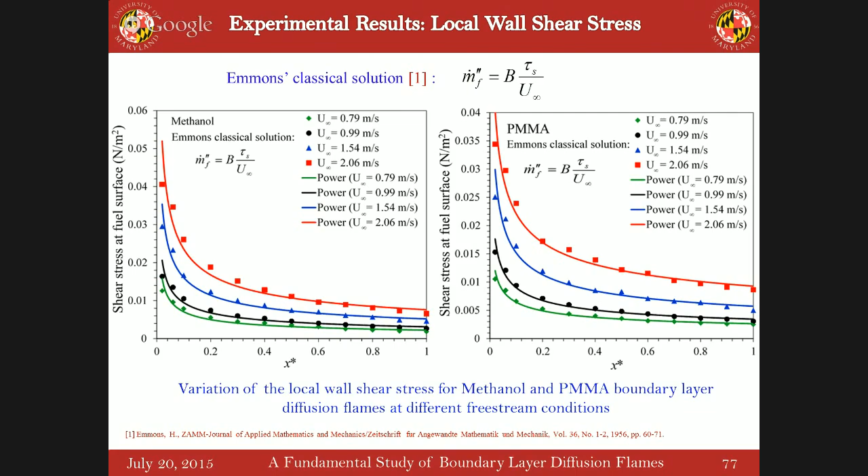Similarly, you can measure the combustion coefficient. The combustion coefficient is nothing but the non-dimensional mass burning rate, represented by the equation above. Now, if you measure the local combustion coefficient...

A thing of satisfaction in the end was that in the range of free stream velocities between 0.79 to 2.06 meters per second, the average of the combustion coefficient multiplied by the Reynolds number raised to power half is obtained as 0.85 and 0.93 for ethanol and methanol, which comes out to be very close to what Emmons concluded for his experiments. So when he calculated these things, they come out to be very close.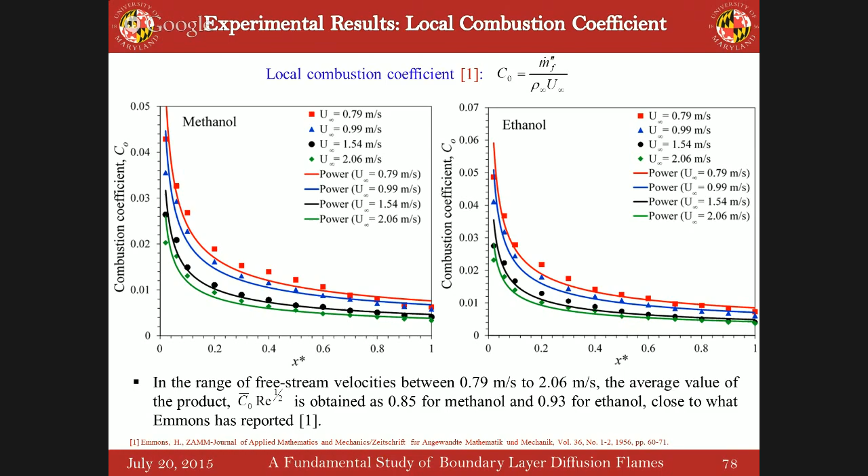What we have done is that we have not used any heat flux gauges. We have only used the thermocouples, and with the help of the thermocouples, if I can get a huge lot of data, it's a good estimate. It's not that bad an estimate, because when we compare the values with those put in the literature, they come out to be close, not that off. So it can be viewed as a technique that can do some simple measurements and get a good result. This is what we have been focusing on.

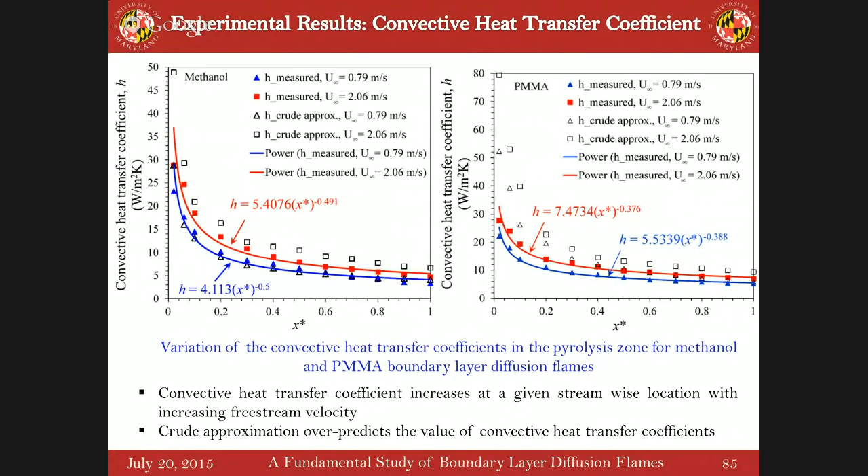In the end, this is the functional form of the Nusselt number, which we derived from the Emmons solution, and we approximated it. This is just for laminar flames where convection is the dominant mode of heating. We have neglected radiation - we are guilty of that, but we have neglected it. You can form a nice expression for the local Nusselt number, and calculate it by plugging in the values for the flame temperatures and wall temperatures from the experiments, getting this nice expression. The Nusselt number is written with root Re x, and then you can compare how your data actually compares with this.

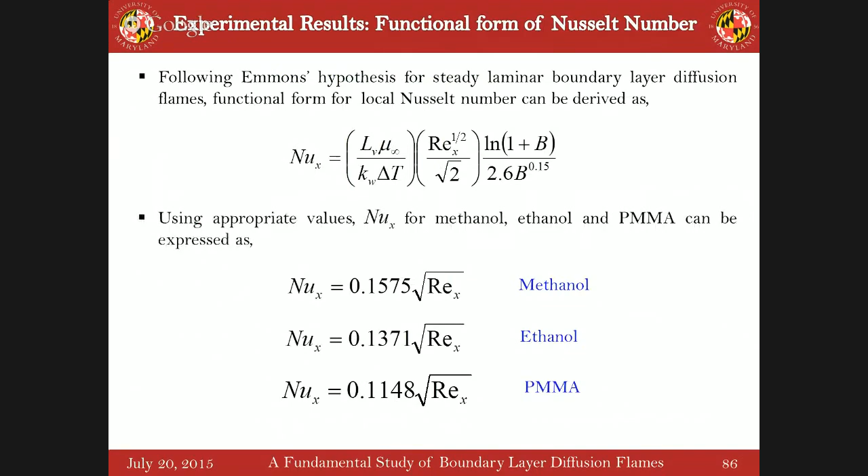Simply, if you look at the local Nusselt number versus root Rex for the methanol and ethanol flames, the black line is basically the Emmons solution in both the graphs, and these are basically our experimental data profiles, from which we calculated the local Nusselt number.

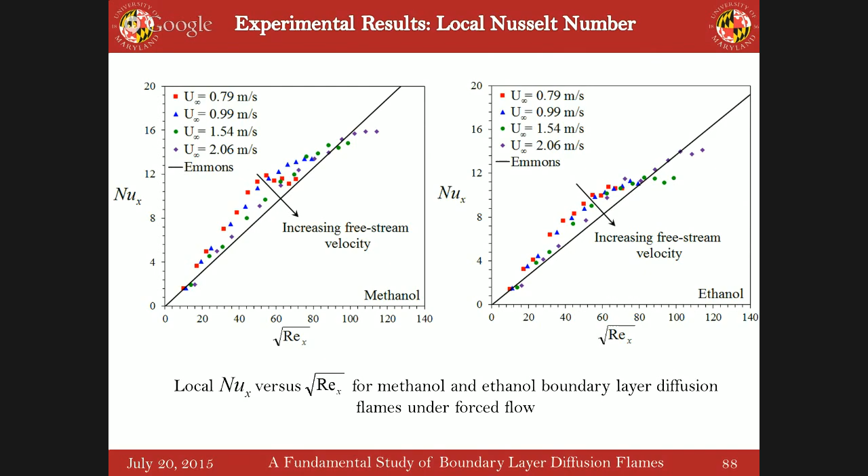What you see is that as the free stream velocity increases, the flames tend to come much more towards, tend to follow, the Emmons solution. For the lower free stream velocities, because buoyancy plays a role and causes those buoyancy effects, the data is somewhat off. But for the high free stream velocities, where buoyancy doesn't play as much of a role, they come out to be very close. So these are very steady conditions, and they agree well for the high free stream velocities.

Similarly, this is for the PMMA. Even for the PMMA, you get the same thing. For the high free stream velocities, they start following the Emmons solution pretty well.

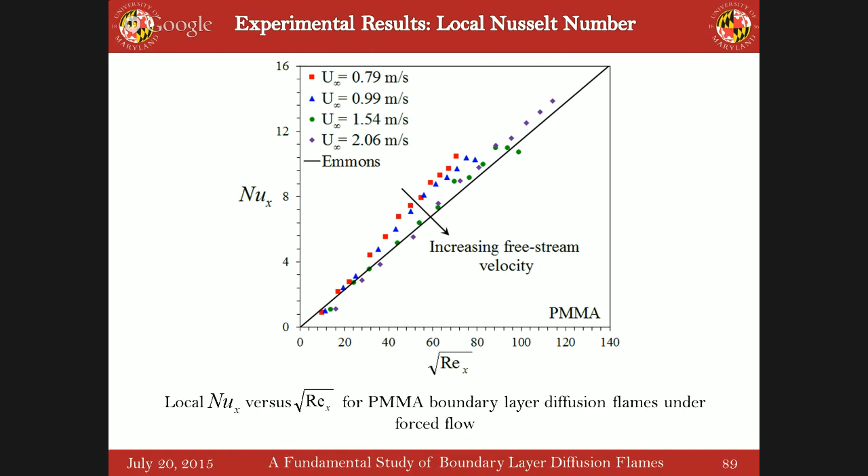We also looked at the transient local Nusselt number for the PMMA. Based on the regression data profiles, you can calculate the local Nusselt number based on that, and approximate it by this relation.

What you see is that at different burnout times, the data has been plotted against the Emmons solution. As you go on increasing the burnout time, the data actually starts deviating from the Emmons solution. That means the flame can only be thought of as steady at the shorter burnout period times, because at the shorter burnout period times, your gas phase is actually steady.

As time increases, your gas phase is not steady anymore, it goes into a transient phase. So you have to make all the measurements within a 150 second window. That means you have to repeat a lot, you have to burn a lot of PMMA sheets, you have to basically use a lot of funds from your advisors to do that. So this is what happens.

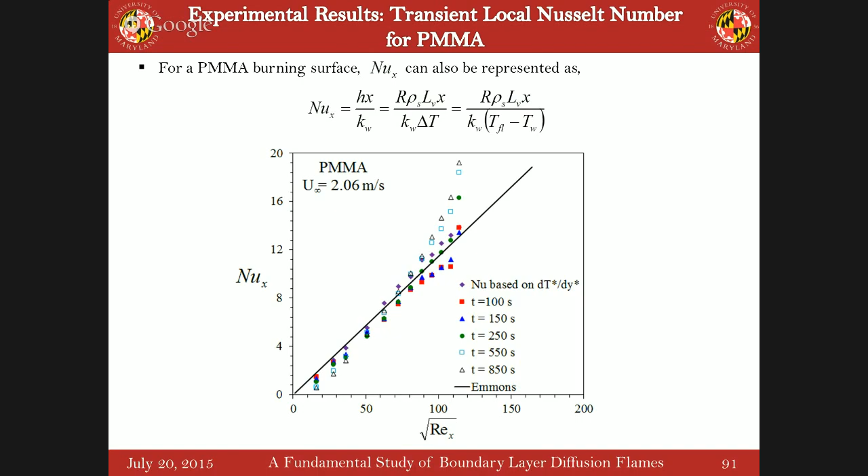That's happening because the surface is regressing, because of the moving boundary effects. And similarly for the flame, at a high burnout time, as you start increasing the burnout time periods, it basically starts deviating from the Emmons solution. So it only agrees very well for the short burnout time periods.

Conclusions. The results from the present study show that there is a unique correlation between the mass burning rate of the condensed fuel surface and the local temperature gradient of the fuel surface. The given methodology works well for both free and forced convection boundary diffusion flames and is capable of giving reasonable estimates of local mass burning rates and heat fluxes in such flames.

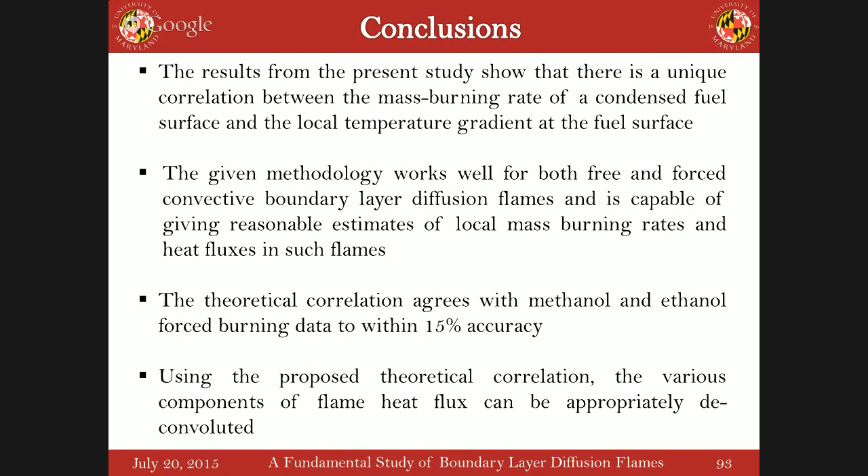The theoretical correlation agrees with the methanol and ethanol forced burning data to within 15% accuracy. Using the proposed correlation, the various components of the flame heat flux can be appropriately deconvoluted. Based on the experimental results, the convective heat flux in such flames is relatively high and contributes approximately 80 to 90% of the total heat flux. These are the small laminar steady flames we are talking about.

We also discussed the shortcomings of using a crude approximation for the determination of the convective heat fluxes, which doesn't do a very good job if you're not doing it correctly, and it will depend from researcher to researcher because they all tend to use different transport properties for calculations. While the burning rate correlation is based upon laminar assumptions, it is hypothesized that this technique should follow a similar form for turbulent burning of a flat fuel surface, albeit with a modified functional relation which must be experimentally determined.

The Reynolds analogy is basically valid for both laminar as well as turbulent burning fuel flames. It will remain valid unless your dP by dx is not equal to 0. If your axial pressure gradient is close to 0, negligible, it holds. If it is not, it does not hold.

Also, it will hold when your Prandtl number is close to 1. If your Prandtl number is not close to 1, you have to introduce corrections for the Prandtl number from the Chilton-Colburn expressions, and then it is valid for a wide range of Prandtl numbers.

So we would like to believe that this will actually escalate to the turbulent boundary diffusion flames as well. But when the flame becomes turbulent, it starts forming soot. If the flame becomes large or turbulent, it will start forming soot, maybe due to some zones which will be richer.

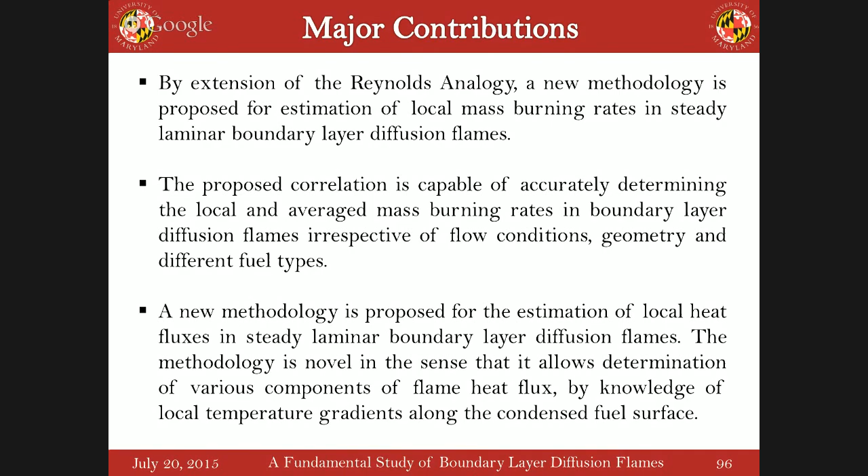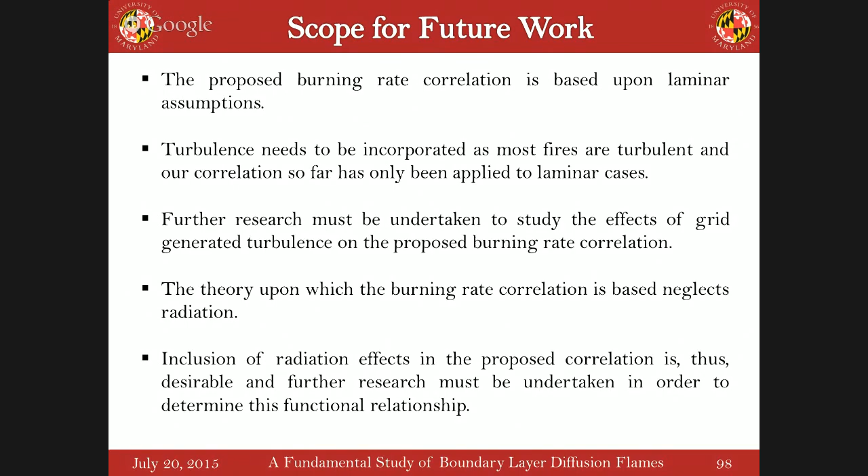The proposed burning rate correlation is based upon laminar assumptions. It totally neglects radiation. Turbulence needs to be incorporated as most fires are turbulent, and our correlation so far has only been applied to laminar cases. Further research must be taken to study the effects of grid-generated turbulence on the proposed burning rate correlation. The theory upon which the burning rate correlation is based neglects radiation. Inclusion of radiation effects in the proposed correlation is desirable, and further research must be taken in order to do that. Now, having said that, let me conclude with this.

If we start looking at the work of Ahmad and Faeth, who basically did his work in 1978, Ahmad wrote his thesis that year. If you look at his turbulent burning rate correlation, mass burning rate correlation for the turbulent as well as the laminar fire groups, it is also based on a convective scheme. It neglects radiation altogether.

But when Ahmad tried to use his burning rate correlation for all kinds of data available in the literature for very large-scale fires, for example the experiments done by Orloff and de Ris, he found that his burning rate correlation predicts really well the mass burning rates, even in flames which are radiationally dominated.

Why was there such a happy circumstance? They didn't know the answer for that. Logarithmic scale—that's the key. You plot your data on a logarithmic scale, and then it predicts things really well. But if you look really closely, you find there is a factor of 5 to 10 difference.

In the data, they identify what the radiation fraction is for the different fuels. So it actually works very well with the radiation-dominated cases as well. So who knows, maybe for the radiation-dominated cases as well, if we introduce some radiation factor, it will work for that case too.

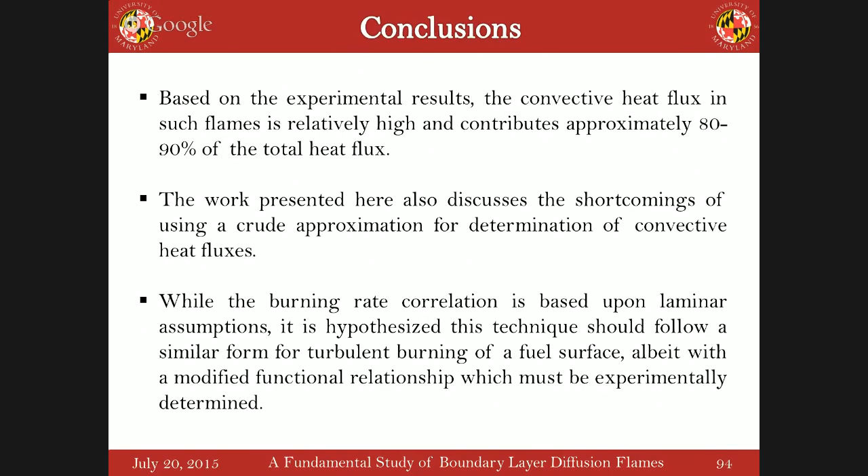You started off with the Reynolds or Colburn analogy, but if you look at the solutions by Emmons or by Ahmad and Faeth, they use the Shvab-Zeldovich variables. Doesn't your premise fall out just from that, that the temperature gradient is related to the burning rate? You end up with slightly different expressions, but it's very similar. It has to be the same. Yeah, it's not the same. That's my question. You end up with expressions that are slightly different. If the Lewis number is equal to 1, it has to be the same. So expressions end up different? I don't know, I can't imagine that it would be different.

But the way you choose your properties is very important. Sure, obviously, because you have a real problem there. That kind of guidance to give to people is very, very useful. So that's why we started using the transport properties, trying to follow the work of Kim, de Ris, and Kroesser, in which they basically formulated the theoretical expression for free convection burning on a vertical flat plate. They calculated all the transport properties at the wall, just Cp, specific heat, and a very particular flame temperature. That was Kim, de Ris, and Kroesser. John has a nice explanation of why he did it that way. So when we started, we were trying to figure out which transport properties to include, because if you start using different transport properties, it will change the results. So we optimized that. Really good job, thank you, very impressive, thank you very much.

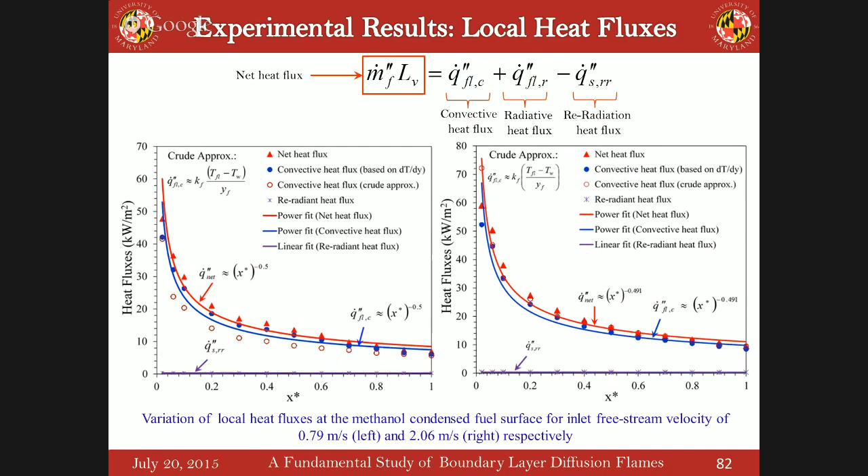The total heat flux that you see at the top of those samples, I think, is kind of low compared to other ones that I've seen. But I didn't see a comparison between what you got by backing that out off your temperature measurements and your estimates by using your mass flux and L, versus what you actually measured with your heat flux gauges. So I wanted to know if you looked at that, because you showed those gauges.

So we didn't compare, we didn't measure it with the heat flux gauge in the pyrolysis zone because we were using the liquid fuels. And for the PMMA, we didn't do it either, because the problem is how you're going to measure that in the case of the PMMA—it's bubbling and everything, it will cover the surface. We only used it for the plume, that's it.

So the heat flux gauge at that boundary, right above your sample, where you have temperature measurements going to the top of that sample, and then the gauge right above that—how do those two compare? So we didn't do it exactly right on top, but at least some distance away in the streamwise direction. It was separated by around 1.5 to 2 inches, something like that.

So basically what you see is it increases a little bit at the trailing edge, it increases as you move toward it. Why it happens is because the flame starts coming back to the wall, and that's why the flame intimately touches the wall and everything. And you get a sharp increase, and also there's a blowing effect—when the condensed phase surface is not there, there is no blowing effect. The blowing effect actually decreases the heat flux a lot.